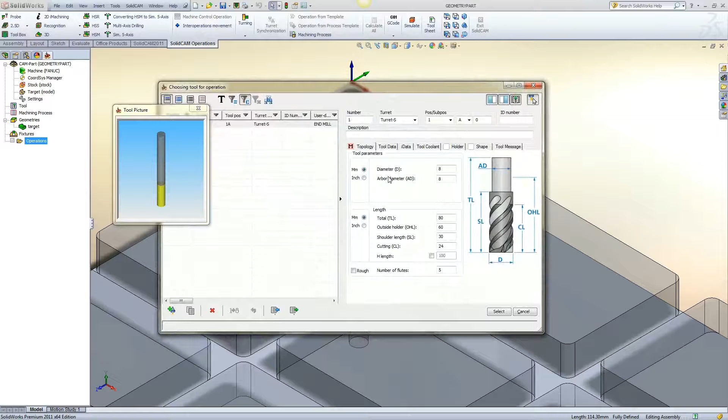First, we are going to create a new iMachining operation. All the examples have the same depths and will use the same tool. For each geometry example, we will simply copy the operation and define the next geometry.

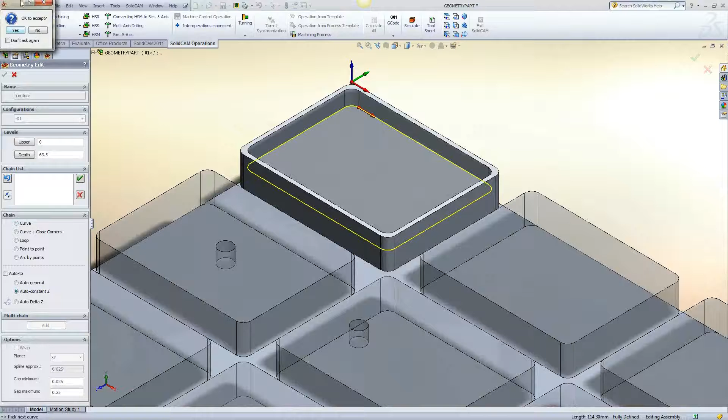The first example will be a simple closed pocket. Using constant Z, the geometry will be closed. For each operation, we will rename the operation with the geometry type.

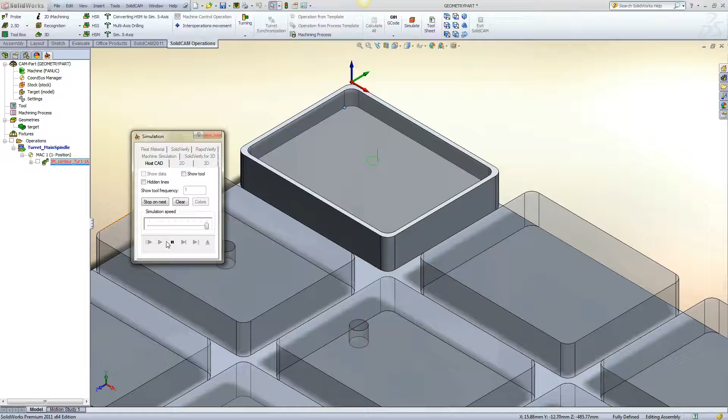For each example, we will simulate the wireframe toolpath in HostCAD after the calculation. Also, I will point out some of the iMachining techniques on the different geometries. On this closed pocket, iMachining will use the helical data from the operation to enter into the pocket, followed by a morphing spiral to the outer edges.

By clicking Save and Copy, a new operation will be created with the same settings and will be opened. For each example, while finding geometry, we will select a configuration that was already set up with the different types of geometries.

This example is of a closed pocket with island. Once again, constant Z is used to close the geometry.

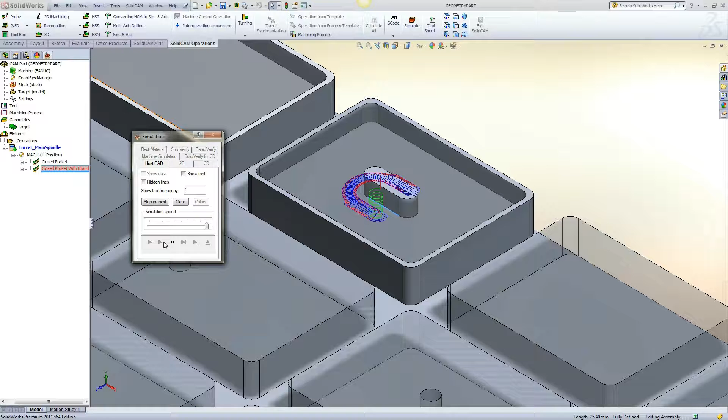In HostCAD, we see the helical entry followed by a moat to separate the island from the remaining material, where a morphing spiral can then be formed.

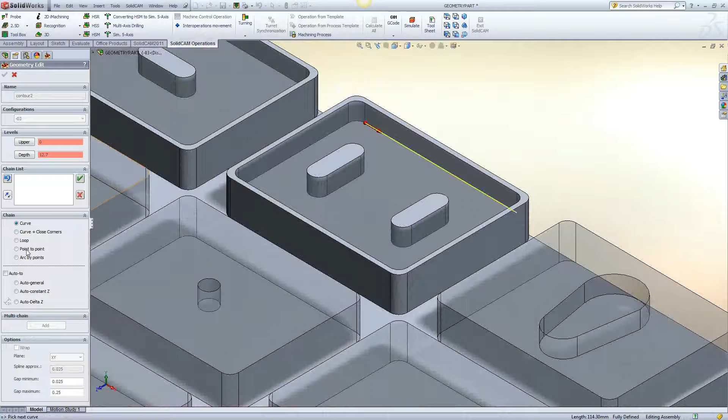This example is of a closed pocket with multiple islands. There are 2 islands in this example, but an unlimited number of islands can be defined.

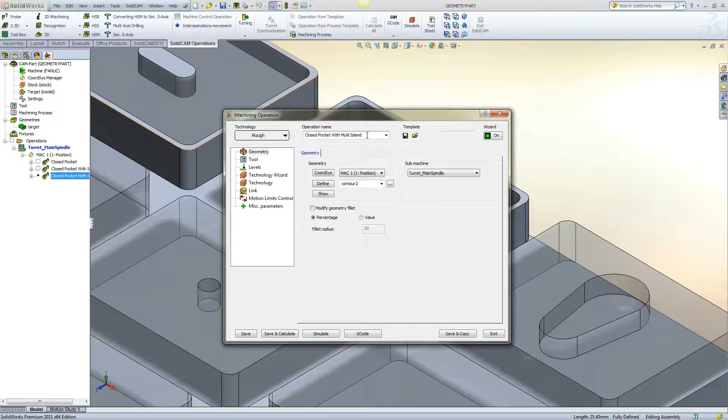Each island is separated when encountered.

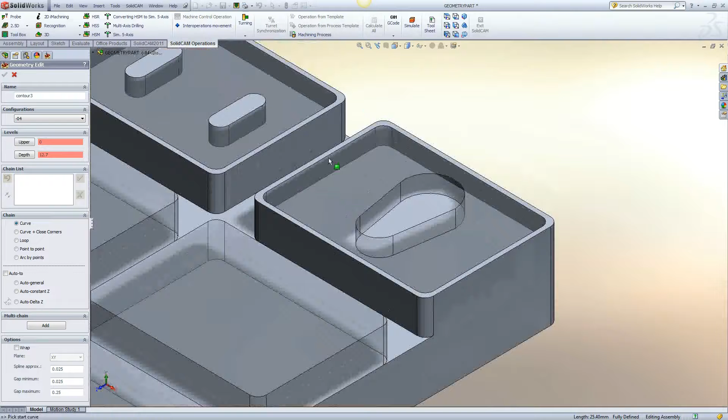This example is of a closed pocket with entry geometry. By right-clicking on the geometry name and selecting Mark Chain as Open, this will inform iMachining that this geometry is for entry and is not an island. Any shape can be used as entry geometry.

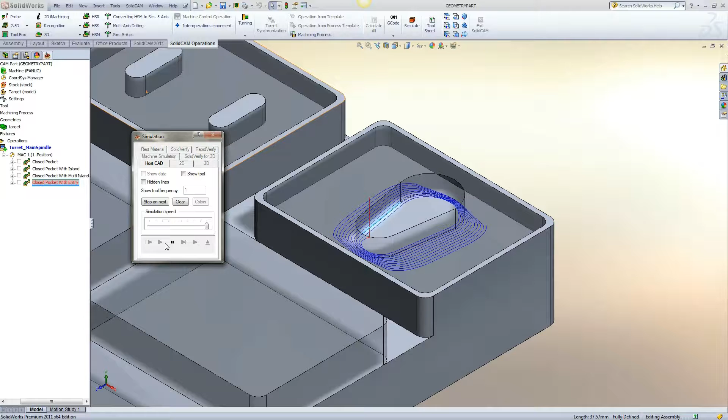A morphing spiral is formed from the entry geometry to the outer walls of the pocket.

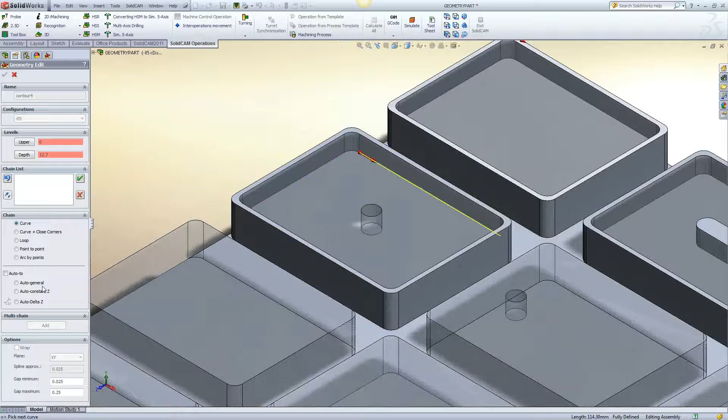This example is of a closed pocket with entry hole. This shows how to define an entry hole that was drilled. Marking the entry hole as open allows the tool to feed down in the hole.

It is important to note that if the pocket has a flat bottom, the hole should have a flat bottom also, since the tool will be fed down to the bottom of the pocket. A contour operation can be used to remove the drill point from the bottom of the hole before using iMachining.

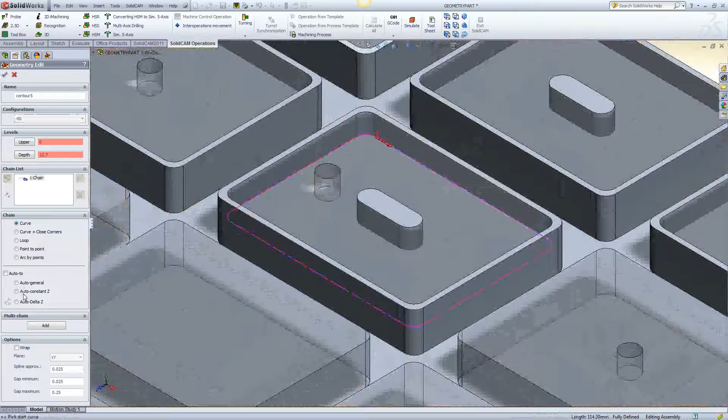This example is of a closed pocket with island and entry hole.

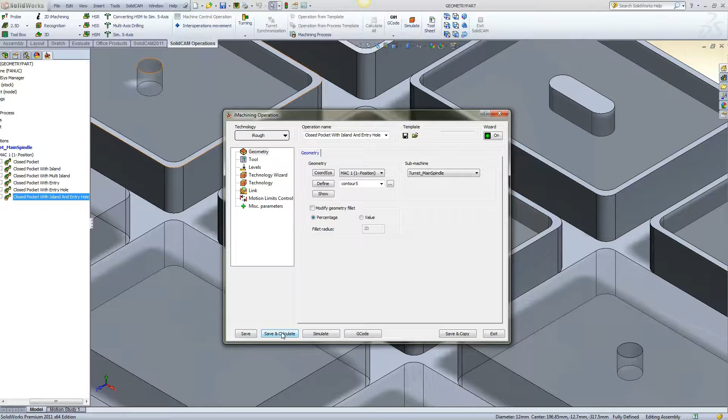The island is separated from the remaining material.

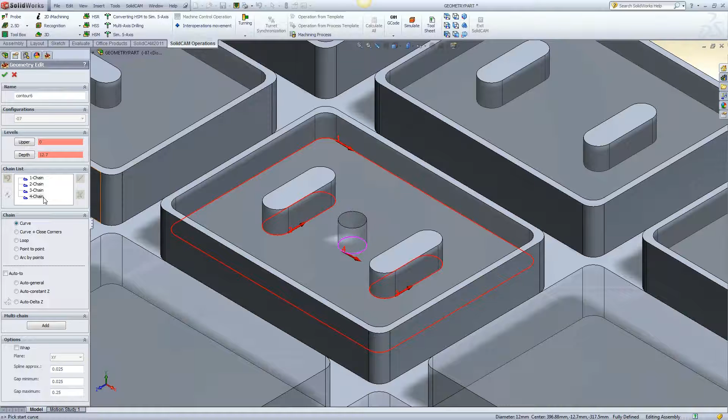This example is of a closed pocket with multiple islands and entry hole. Both islands are separated as they are encountered.